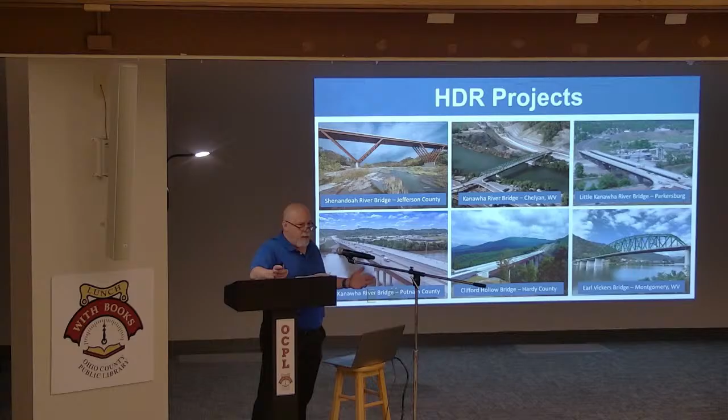So the first part of my talk is about the rehab of the Monument Place Bridge. Constructed in 1817, it's the oldest bridge in the state and was placed on the National Historic Register in 1981.

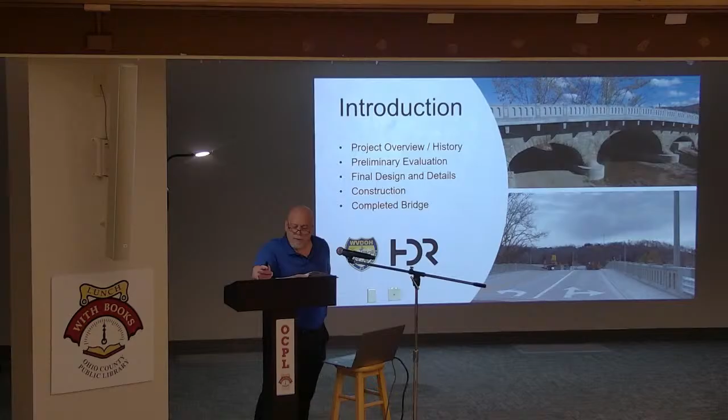So this is a brief outline of this portion of the talk. I just want to mention that the West Virginia Division of Highways is the owner of both of these structures that we're going to talk about today.

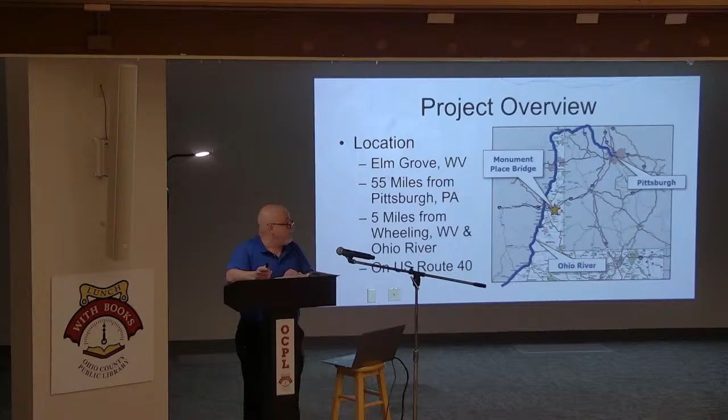So I doubt anyone here isn't aware of where Elm Grove is, but sometimes we forget that this part of the Northern Panhandle was actually a part of Virginia at the time of construction of this bridge in 1817.

In 1806, Congress and President Thomas Jefferson authorized construction of a national road to increase commerce and expansion to the west. The first portion, which terminated here in Wheeling, was known as the Cumberland Road. You can see here in red that it stretched from down in Maryland up to Wheeling, with the thought of extending it beyond that out to the west after they figured out a way to get across the Ohio River.

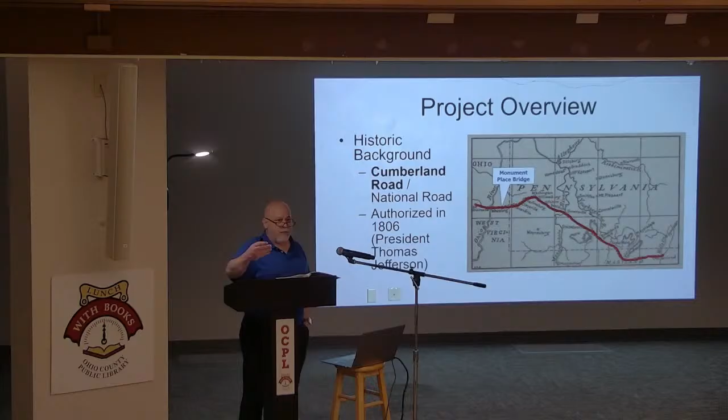So at this time, Henry Clay was the Speaker of the House of Representatives. Clay had a friend named Moses Shepherd, and Moses Shepherd happened to receive the contract to build the road in Virginia, including the necessary bridges.

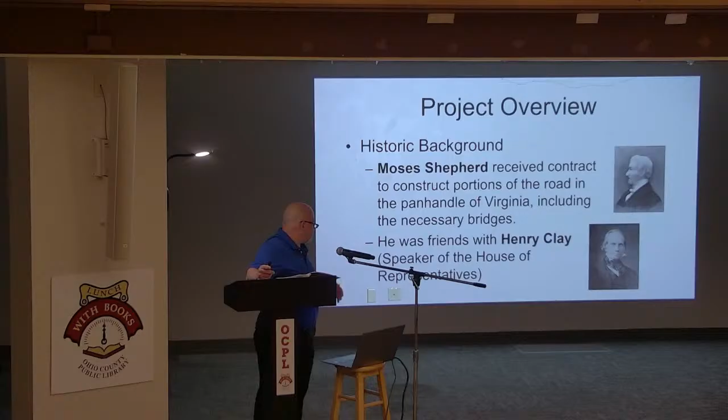So later, the national road became US Route 40, and Route 40 now generally parallels Interstate 70 through the Panhandle. The Monument Place Bridge is shown here in yellow, where it crosses Little Wheeling Creek.

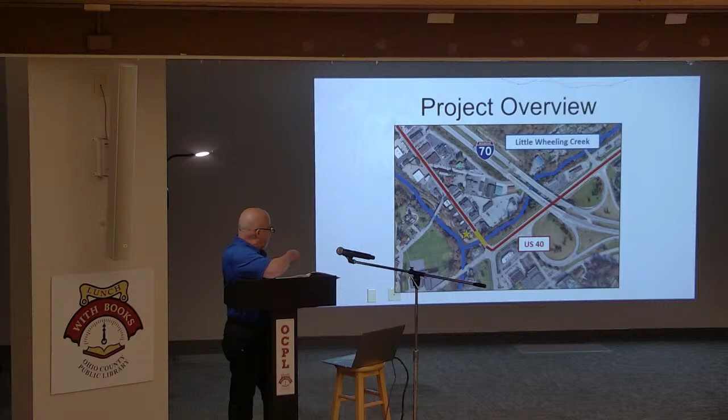It's interesting that at the time when the road was built, there were actually two bridges constructed around the same time, the Monument Place Bridge and what was known as the S Bridge in Triadelphia, also crossing Little Wheeling Creek. So you might ask yourself, why would they cross the creek twice when maybe they could have taken a more direct route and reached the same place?

Well, the answer is that Moses' wife, Lydia, really wanted the road to go past her house. And apparently Moses was a smart man.

The national road crossed Little Wheeling Creek twice. Now, the S Bridge was demolished years ago, but Monument Place Bridge remained.

These are just two photos of the original configuration of the bridge. On the left, the photo from the late 1800s, and on the right, the photo from the flood of the Ohio River in 1907. These photos were graciously donated to me to use by the Ohio County Public Library, and I appreciate that.

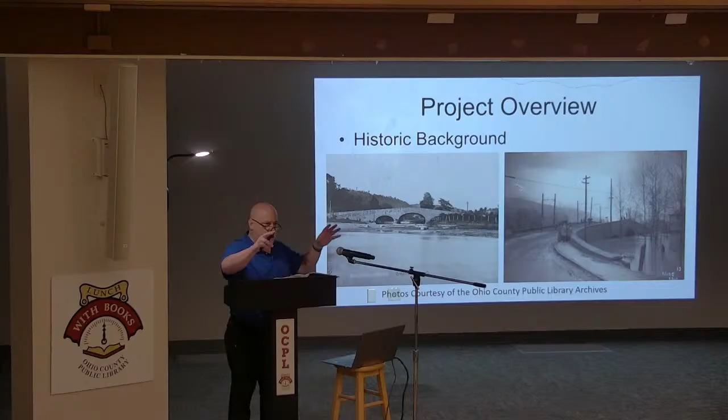So when we were first selected for this project in 2008, yes, 2008, this was the condition of the bridge. Much of what had been added, the concrete overhangs and sidewalks and the shotcrete over the surface of the bridge, was in very bad condition, as was some of the masonry underneath.

So this is one of my favorite pictures of the condition, and you can see that the barrier is being propped up off the telephone pole with a block of wood. That's the condition the bridge was in in 2008. One thing I'll note here, these utility lines attached to the bridge were wrapped in asbestos, so that became an issue along this process.

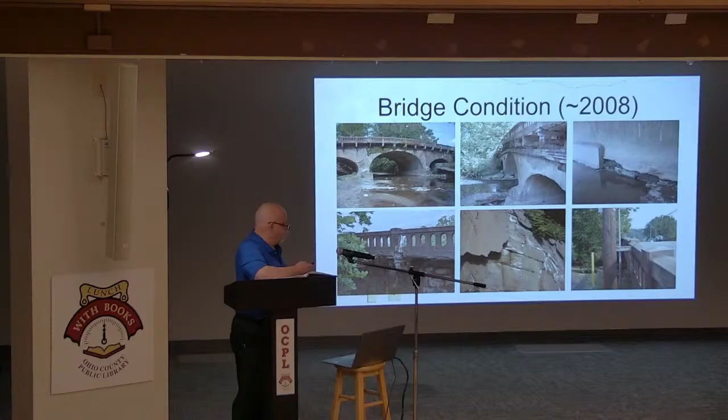So this is a timeline, and I don't expect you to read all this, but you may ask, why did it take 16 years for this project to get done? Well, when we first got the project in 2008, I had visions of celebrating the 200th anniversary birthday of the bridge in 2017 with it all being completed. But unfortunately, there were a lot of things that went on, and I'll just mention a couple of those.

We initially had a slow start on the project. Even after being selected, it didn't really get started for a while. There was a lack of information on the bridge, obviously no original design plans, so we had to get a lot of information out there in the field.

We had to have those asbestos pipes removed. We had to remove the shotcrete so we could see the condition of the masonry underneath. And we had to do a lot of field testing, drilling cores into the rock to determine the strength.

Some other things: just the nature of the historic process and environmental process took years. There were so many stakeholders on this project that it took collaboration on every phase. There were also utility and right-of-way complications that I won't get into, but that delayed the project at times.

We ran into the pandemic, which we know delayed a lot of things. And we also ran into the I-70 bridge rehabilitation project. So Route 40 was a detour for that project, and we couldn't very well close Monument Place Bridge at the same time they were working on the I-70 bridges. So that sort of explains, to some degree, why it took so long.

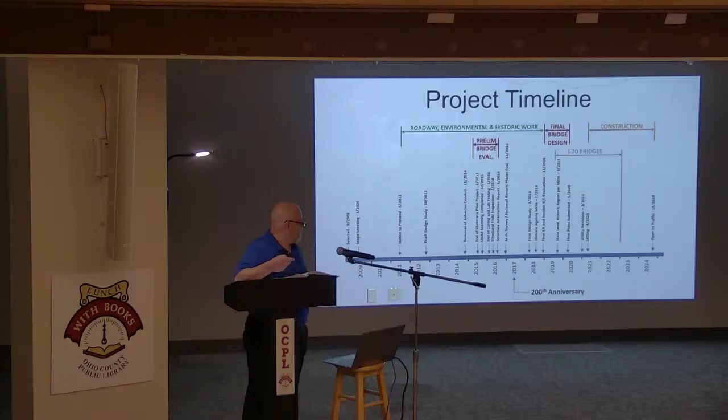So just a couple shots here of what some of the field work that was done. You can see here on the left, cores being taken from the masonry, and then those cores were tested to determine all the rock strength parameters.

The DOH themselves went out and did a LiDAR scan where they go out and determine exactly where everything is electronically. And this isn't a photo, this is data from that LiDAR scan. And from that, we were able to construct a computer model of the bridge and really identify each individual stone that was on that bridge.

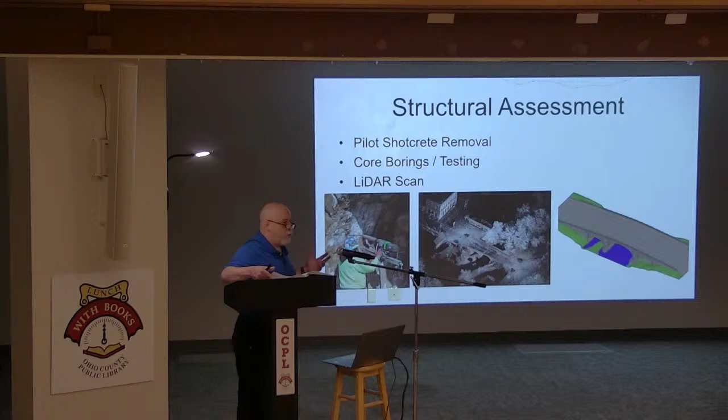So after that was done, we went in and looked at each individual stone in the field and classified each one in terms of their condition, whether they were severely deteriorated, mildly deteriorated, or pretty much sound. You can hopefully see here some of these red circles, and you'll note that these were joints in the sidewalk where water could spill through. And the worst deterioration occurred because you have roadway salt and that sort of thing spilling through onto the masonry below.

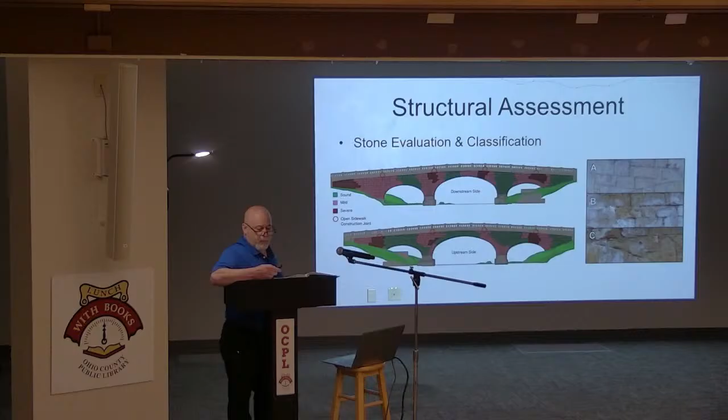Then we used a software that is from Great Britain to do the analysis. They have a lot of masonry arches there, and they have software you can use to analyze the arches, and we did that. We entered all the existing conditions of the different stones and ran the analysis, and what we found was the bridge had adequate strength even for today's modern highway vehicles. So nothing really needed to be done in terms of adding strength to the bridge.

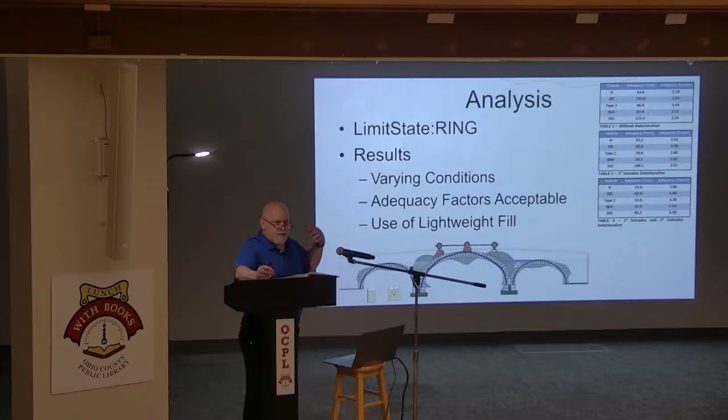One thing we did want to do, though, is minimize the loads on the foundations of this bridge. So we made the decision to remove the existing fill above the arches, the old dirt and rocks, and replace that with new lightweight reinforced concrete. That would lower some of the loads on the foundations.

So what I'm going to do now is just step through some of the details from our final plans.

If you remember one of these photos from the pre-rehab condition, the base of the arches were being eroded from the stream itself. That's called scour, and we needed to protect those bases, those foundations. So we designed and put on the plans new concrete jackets to be installed around the bases of the arches.

If you were to cut a section down through the bridge at this point, this is what it would look like. You'd be driving in and out of the page up here on the roadway, and this is the bottom underside of the arch. This is the portion that we filled with lightweight concrete, shown here in blue. That lightweight concrete is about 120 pounds a cubic foot, which is about 30 pounds less than normal weight concrete.

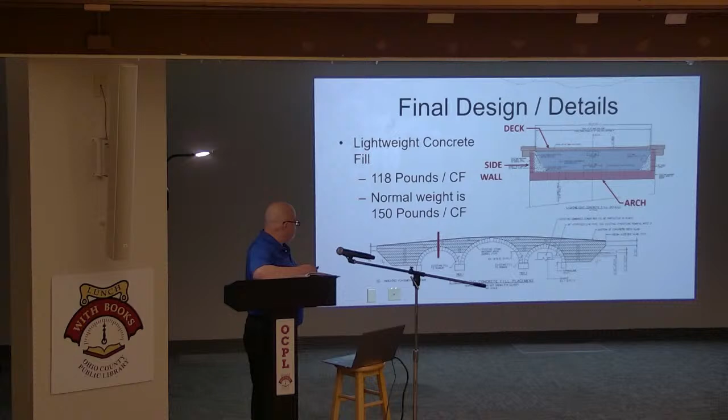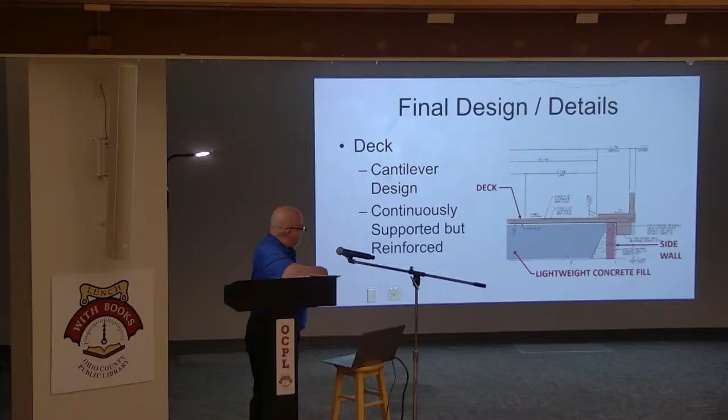The next part was the deck, and we designed it as if it was not supported continuously underneath, just to be conservative, and reinforced it with steel reinforcement. So that deck would have adequate strength even if there was some subsidence underneath. You can see the sidewalk was cast on those cantilevers beyond the sidewalls of the arch.

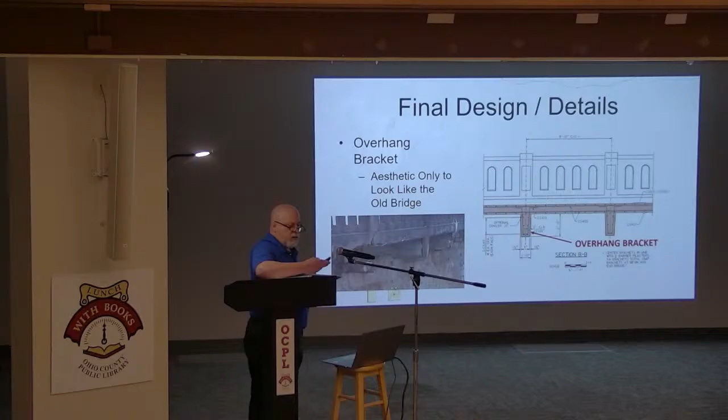One of the other things we added to the design was really driven by the environmental and historic process. They wanted this bridge to look as similar to the original bridge, at least how it looked after 1930, with the overhangs and the railings. One thing we included were these overhang brackets. If you look at a picture of the old bridge, these brackets supported that overhanging deck. We didn't need those with our new deck, but they wanted them anyway to mimic the appearance of the bridge before the rehab.

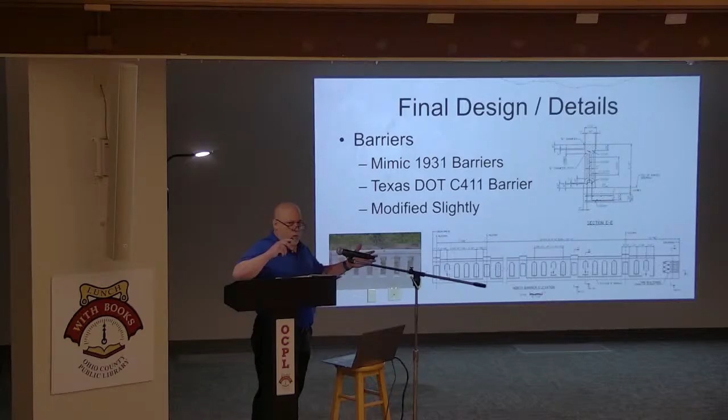The last detail I'll mention is the barrier itself. That was a big consideration, and we needed to provide a crash-worthy barrier for modern vehicles. So the problem became finding a barrier that resembled the 1930s barrier but was still crash-worthy. We hunted all over the place and found a standard barrier from the state of Texas that very closely resembled the barrier that had been on the bridge. So that was the barrier we utilized, modified a little bit to get it closer.

You recall we mentioned that salt water from the deck might spill out through. Well, that barrier from Texas has openings in it, little windows, and we didn't want that. So we actually cast concrete where those windows were to seal that up and prevent water from spilling down.

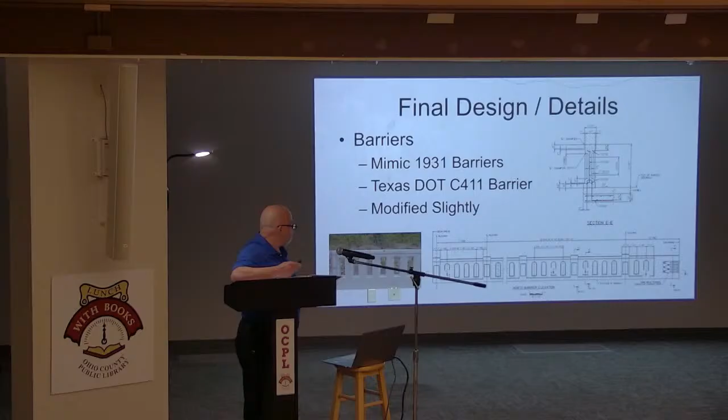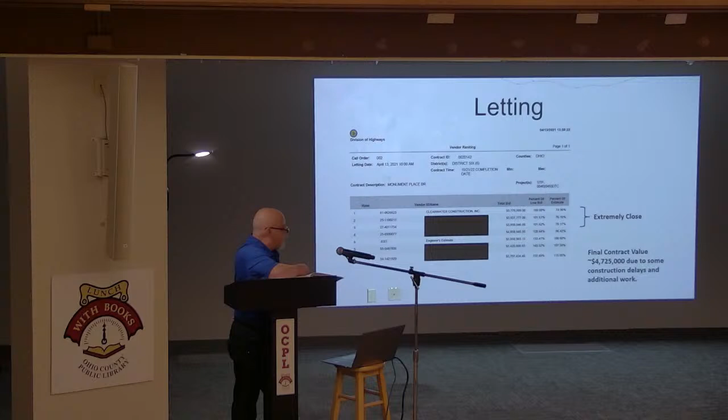In April of 2021, the project was bid, and the winning contractor was Clearwater Construction from Mercer, PA. The low bid was $3.8 million. I doubt you can read this, but the top three bids were all within about $100,000, which is good - it shows you have a close, nice, tight set of bids.

In the end, with some additional work added to this project, I'm told the final contract value came in around $4.7 million after the extras, and that was very close to the engineer's estimate, which was just over $5 million. So there was nothing out of the ordinary or unanticipated on the project.

So I'd like to show you now some photos from the construction of the bridge. The first thing the contractor wanted to do was work in the dry - he didn't want to have to work with the stream flowing. So he constructed cofferdams around and diverted the channel around his work zone so that he was able to work.

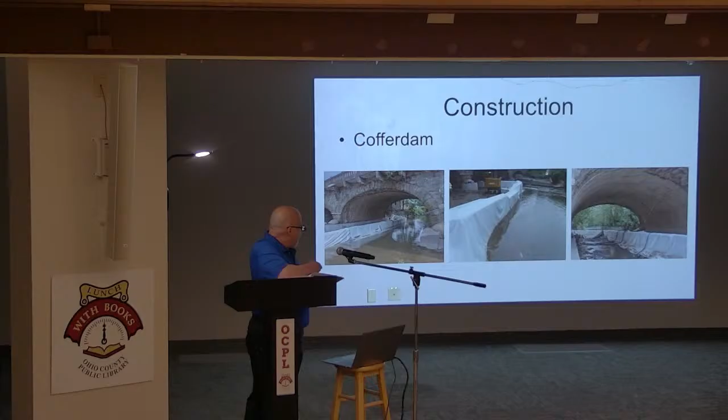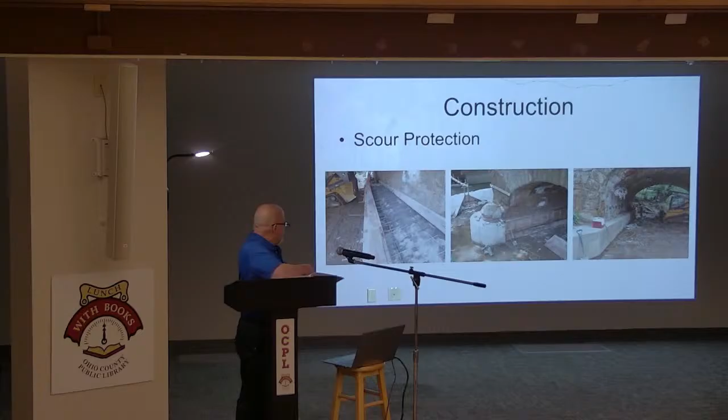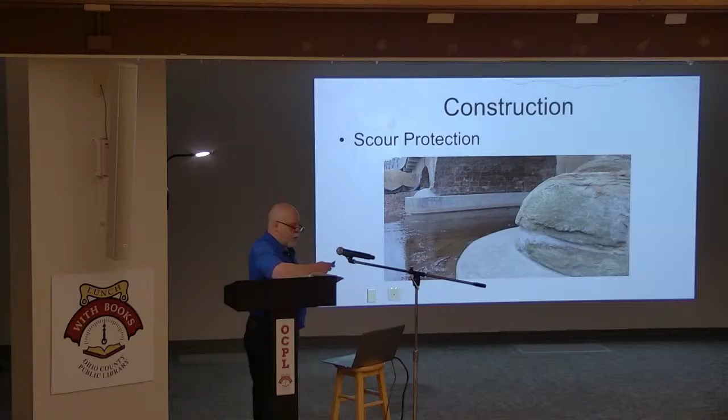When it was all said and done, I think the contractor really did an excellent job with this. He even took it upon himself to form one of the rounded ends here that we didn't expect. So you could tell that he really cared about how this looked when the project was over.

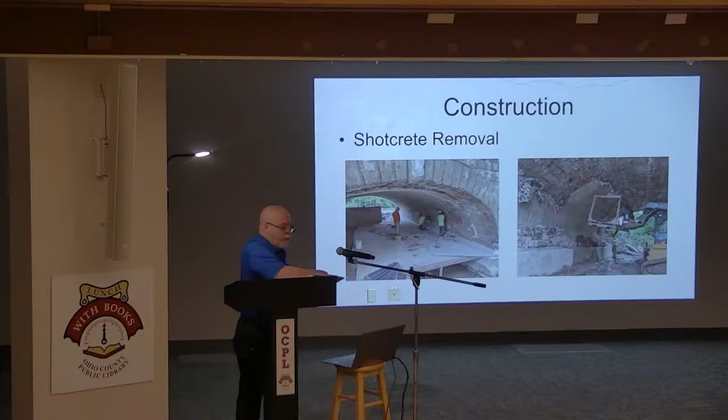Once all the shotcrete was off, we assessed the stone, and frankly, a lot of the stones were much smaller than we had anticipated underneath that shotcrete. So it took tons of time and effort and craftsmanship to repair the damaged stones, and also to repoint around each and every stone with new grout. It took a long time, and when I visited the site, there were craftsmen from Eastern Europe working on this who had been masons there. They spent a long time doing all this handwork.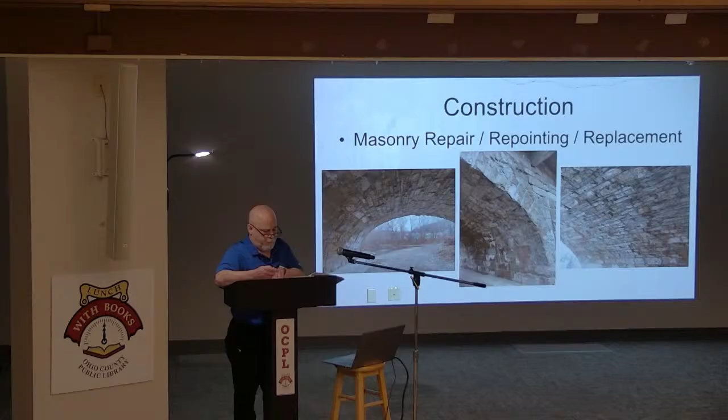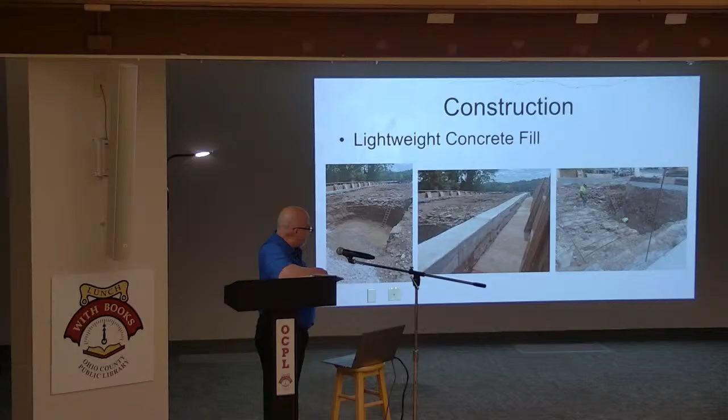After that work was done, we had removed all the dirt, rocks, and fill that had been above the arches. These are some shots of what it looked like with all of that taken off. You can see the rough top of the old arches and workers placing steel reinforcement for the new lightweight concrete fill.

After that was placed, steel reinforcement was placed, the deck was formed, and the sidewalks were formed, and that was poured.

Then the barriers came along. It was very interesting how they formed those barriers. You can see they constructed forms with styrofoam inserts for the windows, then cast the concrete around those forms. This portion of concrete in those windows is only a couple of inches thick.

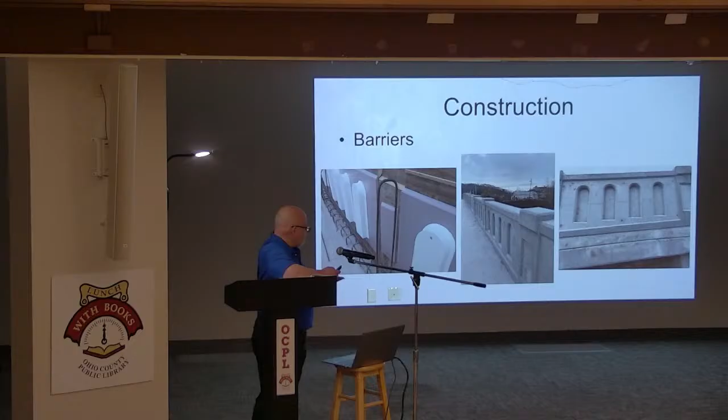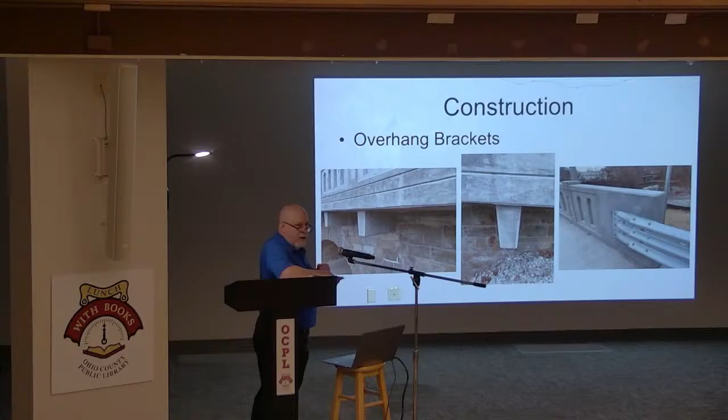We had talked about those aesthetic overhang brackets. This is what those look like after construction. They serve no structural purpose, but they're there to recreate the appearance of the bridge before the rehab.

Finally, I'll step through some photos of the completed bridge here. Some of these were sent to me from our contractor, Clearwater Construction. I think the appearance is accurate in terms of historically recreating what it looked like before.

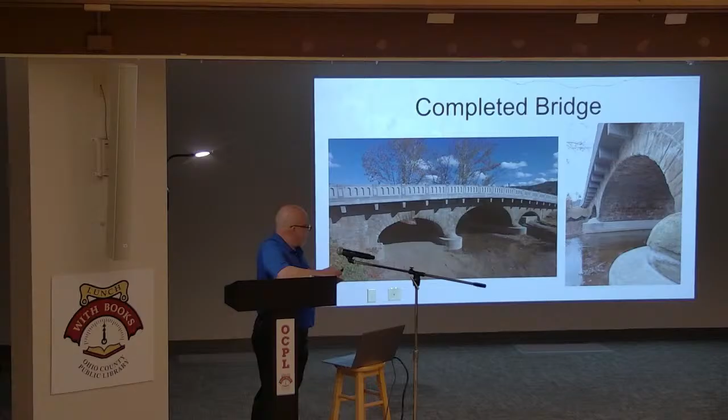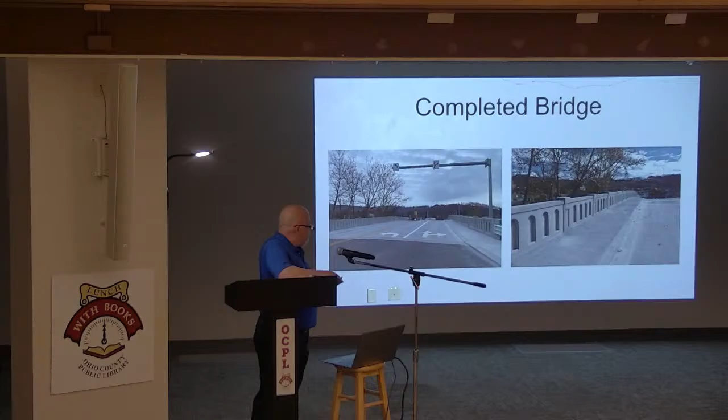But again, all the safety considerations were taken into account. We have crash-worthy barriers. Everything's designed, and we believe the bridge will last for many years to come. It was open to traffic in November of last year.

There's a nice quote here from Tracy Brown, the West Virginia DOH state bridge engineer. He says the bridge has been used and crossed by multiple generations over 207 years, including famous people like Andrew Jackson and many others. He believes the recent renovation will help ensure this historic bridge continues to be used by future generations, providing them a direct connection to a special piece of West Virginia's infrastructure that's been around since the infancy of our country.

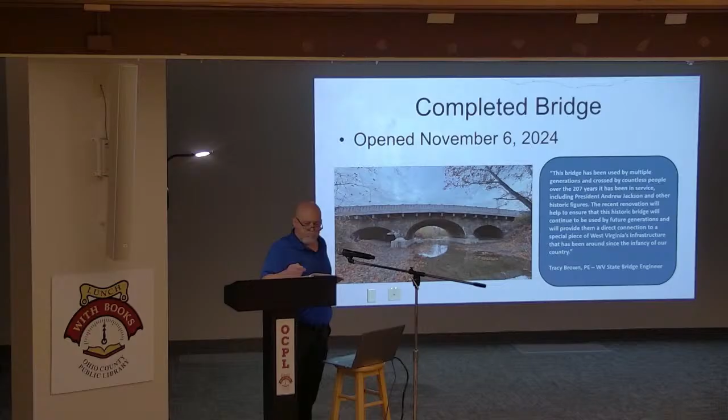So before I move on, we've got a couple minutes. Are there any questions about Monument Place that I could answer here in the middle? Yes, sir.

Our estimate—because in the environmental process you have to do a no-build and a complete replacement alternate—and if I remember right, that cost was actually more than the renovation. It was in the $5 to $6 million range. So this rehabilitation was not to be considered non-cost effective.

The question was, with recent flooding, how did the bridge come through? I haven't been made aware of any issues with this bridge. I'm sure District 6 of the DOH had done their inspections after all that flooding occurred, and if there had been anything in terms of scour or anything like that, I'm sure we'd have probably heard about it.

So, all right, I'm going to move forward to the second part of our discussion about the Wheeling Suspension Bridge rehab that was done. Again, just a brief outline: I'll talk about the history of the bridge, the scope of the rehabilitation, some of the unforeseen issues that came about throughout this project, and some specific structural repairs done during that rehab. Someone mentioned they didn't see much difference in the bridge after the rehab, and I'll say that on historic projects, sometimes that's the goal—you don't necessarily see the difference.

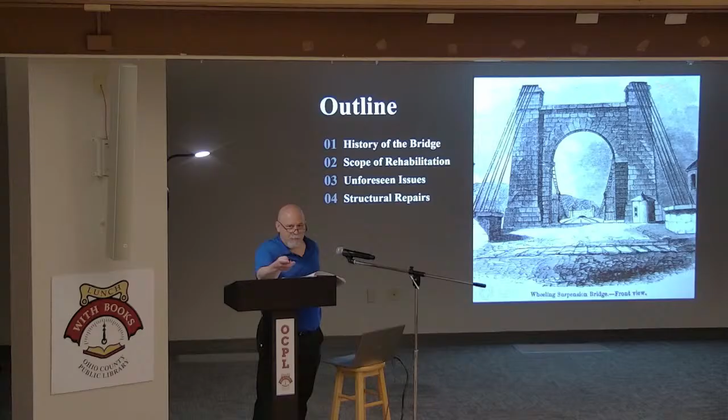So the history of the bridge: it was originally constructed in 1849. Charles Ellet was the designer and contractor on the project. Actually, the cost at the time was $250,000 for both the design and the construction. Just for information, the most recent Ohio River bridge that the state of West Virginia has done here was the Wellsburg Bridge, and that cost was $131 million.

So prices have gone up a little bit. The main span of the bridge is just over 1,000 feet—that's the length between the towers. If you go all the way back to where the cables come down in town and over on the island, it's over 1,300 feet long. But when we talk about a main span, we talk about that clear span between the towers, over 1,000 feet.

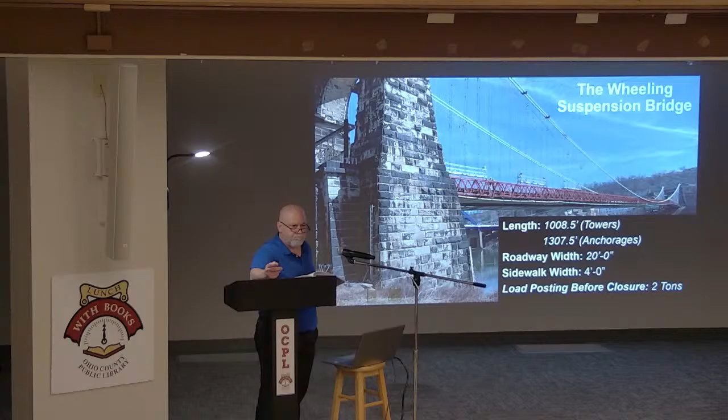And this is the original report that Charles Ellet did, over here on the right. It's hard to see the text—in fact it disappeared. But at the time, this was the longest clear span in the world, over 1,000 feet. Just for reference, the longest clear span in the world right now is over in Turkey, and it's over 6,600 feet long, which is 1.25 miles. So they've really pushed the limits since this bridge, but this definitely was a record setter when it was first constructed.

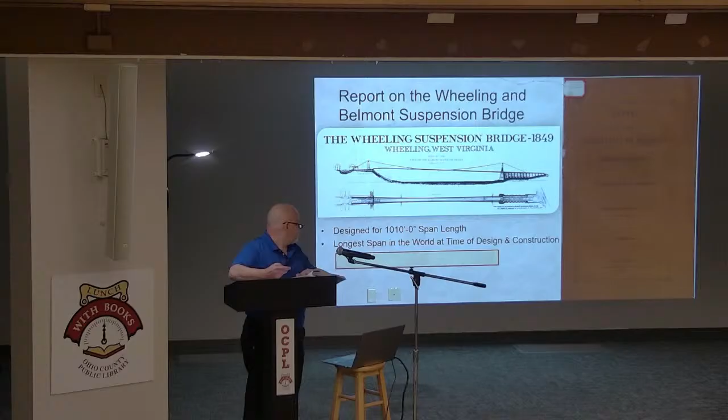Ah, there it is. So unfortunately, in 1854, there was a terrific storm. This is a quote from the Wheeling Intelligencer in 1854, and if you want, the library here has reprints of all those articles online. I'd encourage you to go read what people had to say about the collapse of the bridge in 1854. Pretty much the whole deck and a lot of the supporting elements collapsed into the river in that terrible storm. We believe it was probably due to wind, to excitation of the bridge, but it did collapse.

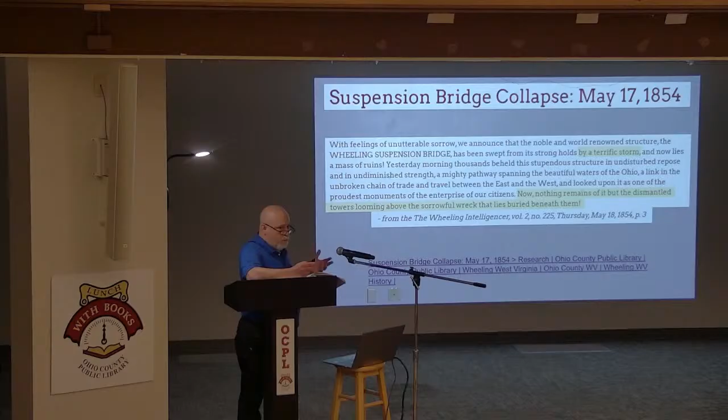And the towers were left. Some of the main suspension cables were left in place—some had fallen but could be reinstalled. And that's what was done. In less than two months, they opened a 14-foot wide temporary structure. It was a single lane, and it reused much of that—the towers and the main suspension cables.

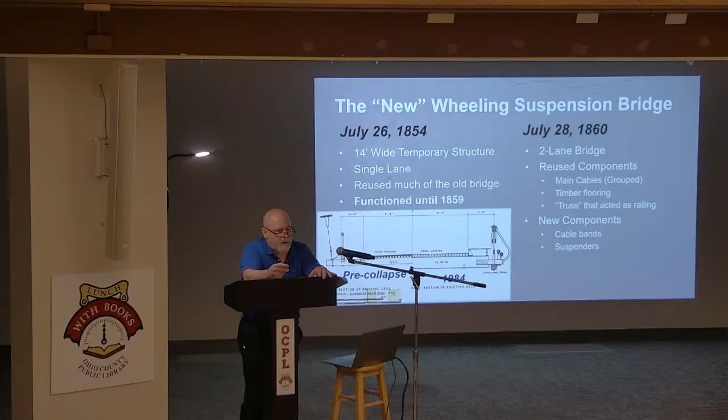And it wasn't until 1860 that it really took its configuration. They added a lot of different suspender cables and additional strengthening to the bridge. But this bridge has changed over the last 170 years. I had a timeline here of all the different work that had been done on the bridge, but I took it out of the presentation because it was too hard to read, and there were really too many different times that this bridge was worked on and different components added.

So when we were selected for this project, the scope of work was supposed to be providing new lighting for the bridge—both functional and decorative lighting—doing a full paint job on the bridge, and doing what were really maintenance and preservation type repairs structurally. Nothing significant in terms of the strength of the bridge, but just repairing things that had deteriorated.

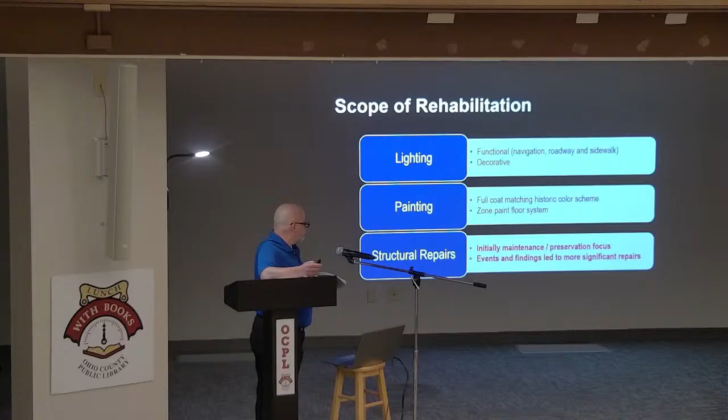So the first thing we had to do were a lot of field inspections. We wanted to get arm's length on every component of the bridge, and that's what we did using whatever means were necessary. We did barge work to get out in the middle of the river. We have a group of free climbers that do rope-assisted climbing to inspect all the cables.

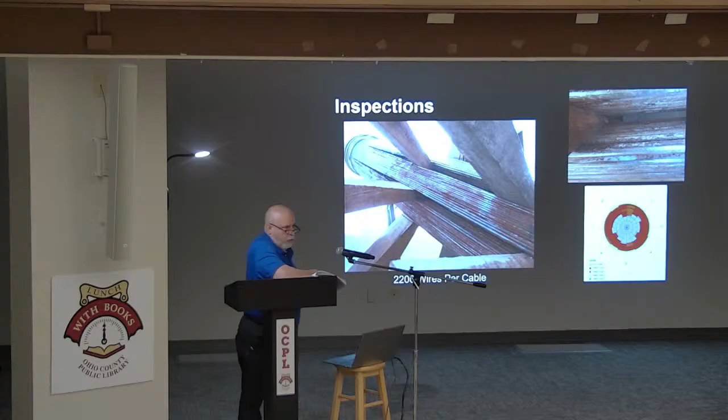Good. It took a lot of work, and not from me - the electrical engineers spent a lot of time developing the schemes and determining what fixtures would work and give the appearance that everyone wanted. On our design plans, we actually included a lot of the rendering information so that in the field, when they installed and tested the fixtures, it would give the appearance that everyone had agreed to.

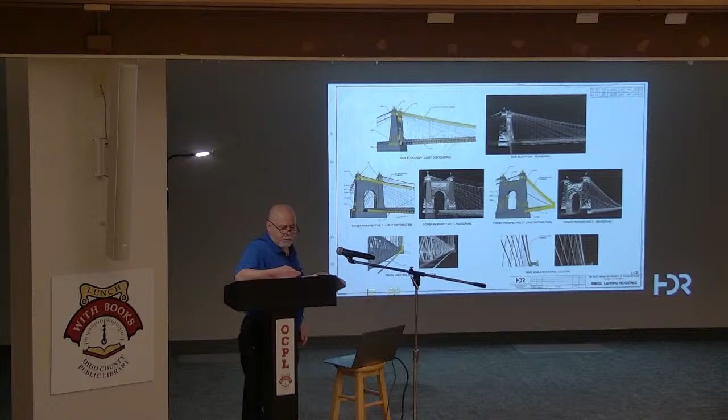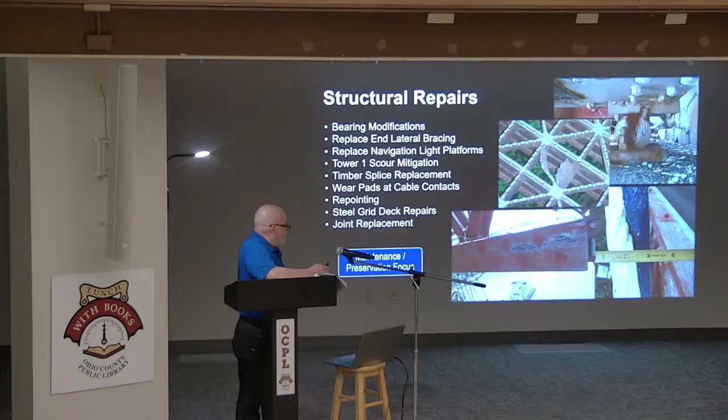But I'm going to talk about a couple of things that happened that changed the scope of the project.

You guys remember this? I was standing on the beach in Myrtle Beach and I got a phone call. It was the district engineer in Moundsville, who called me and said, 'I think we got a problem.' He said, 'What should we do?' He knew that folks had to go out and look at the critical components of the bridge and determine if there had been any damage. Because the bridge has for years been posted at 2 tons, and the bus weighed about 20 tons - 10 times the posted limit.

Well, luckily, no distress was found in any of the main components.

Not long after that, a lot of people asked me, well, if you can drive a 20-ton bus across that bridge, why isn't the weight limit 20 tons? That reminded me of this - I like Calvin and Hobbes. It reminded me of the cartoon where the son asked the dad how they know what the load limit on bridges is, and the dad said, well, they drive bigger and bigger trucks over the bridge till it falls down, then they weigh the last truck and rebuild the bridge.

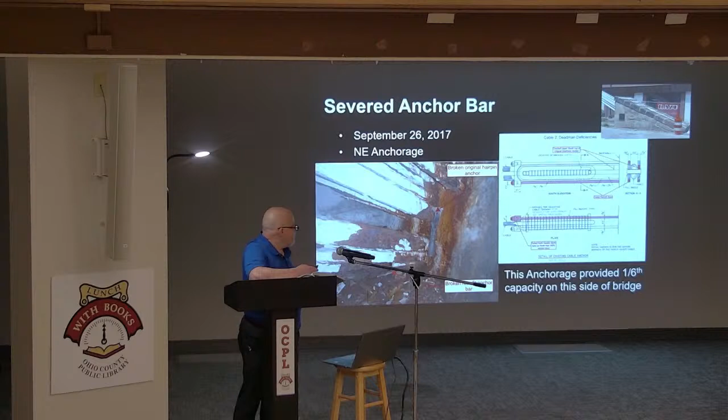We also found two breaks in the anchor rods on one of the main cables. That reduced the capacity on that side of the bridge by about one-sixth. There are two main suspension cables, and they split into three groups each when they enter the house, so there are six sub-cables in each of these anchorages, and one of the bars that connected one of those was fractured.

Another thing found around that same time frame was some deterioration of the stay and sway cables. Those are the smaller cables that you see, looks like a nest, okay?

They actually had one that snapped. I don't know if you remember that, but the bridge was closed then because that occurred. And it was found that a lot of the other ones were reaching a serious condition like that too.

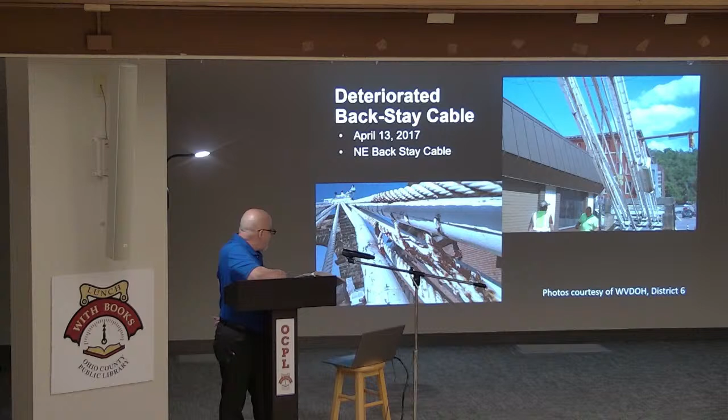You can see some of those cables. This is one of the stay cables - stay meaning in the plane of the bridge. Sway cables went off to the side, sort of to take wind in that direction. You can see one of these stay cables here just unwrapping.

So we knew that something needed to be done and added to the scope of the project.

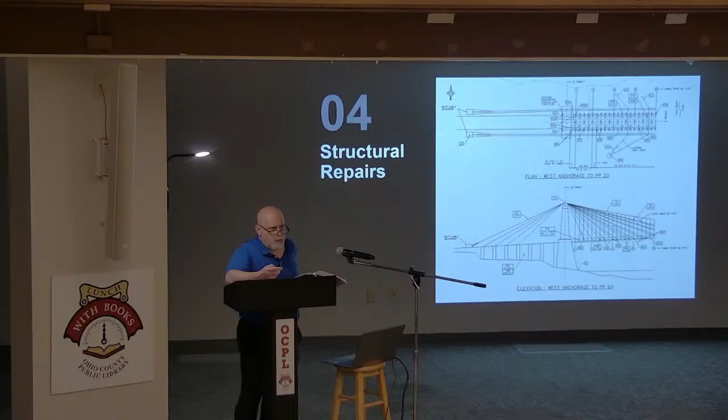With the deteriorated stay cables and sway cables, and the fact that it appeared that at least some of them were reaching their life, the decision was made to replace all of the stay cables and sway cables on the bridge. That was a big effort.

When you go out there and look at all the cabling - not the main cables, but all the other cables on that bridge - and see how many there are, and the amount of steel cable that went into that work, it was a lot. That was a significant part of the cost of this project, replacing all those cables. One of the things the contractor had to do was we defined what type and size of cables needed to be replaced out there.

We replaced them in kind, so you couldn't really tell the difference that something had been switched out. But we had to unload each of those cables, measure the tension in them, put new cables in, and jack them back to that same tension of each cable that was removed on that bridge.

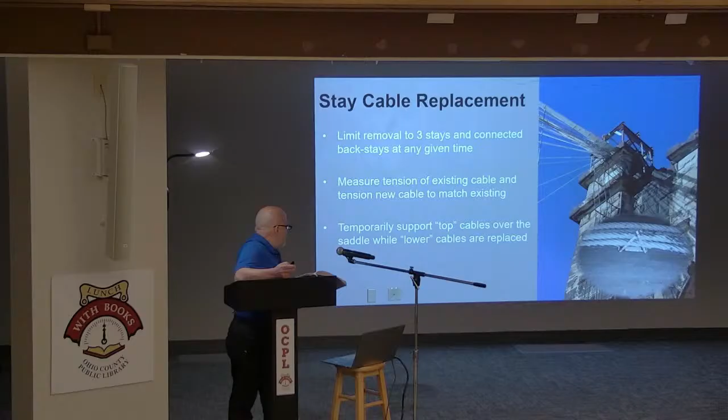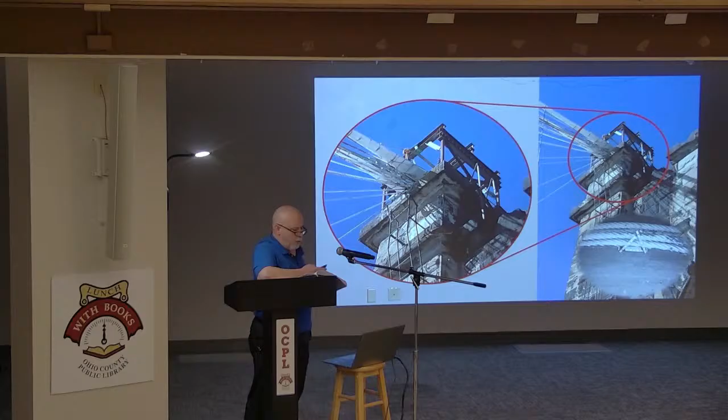And that's sort of this process. I'll point out that there was a huge nest of cables, some underneath the main suspension cables on top of the tower, and that created a very difficult situation for the contractor to be able to get to those cables to replace them.

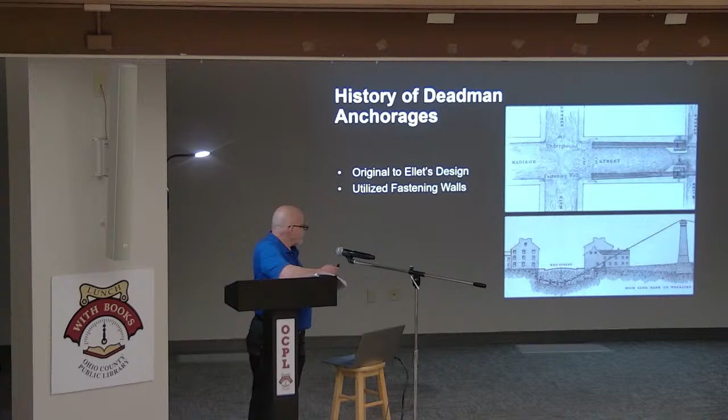So with those unknowns, the decision was made to design an independent anchorage system for that failed location.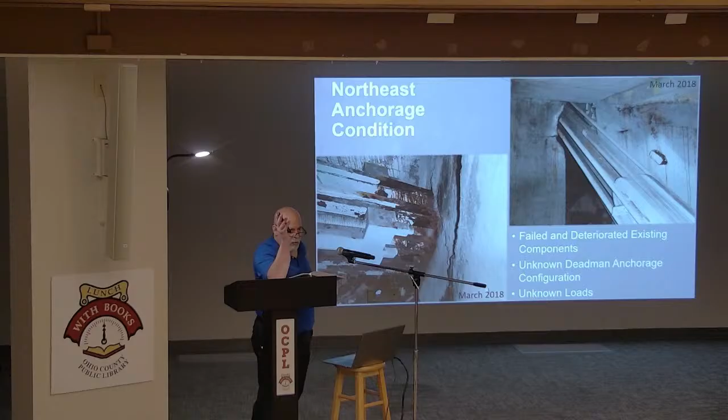Actually, one of the repair anchor bars is one of the ones that failed. So it wasn't just the original anchor bars, it was some of the repair steel that was problematic.

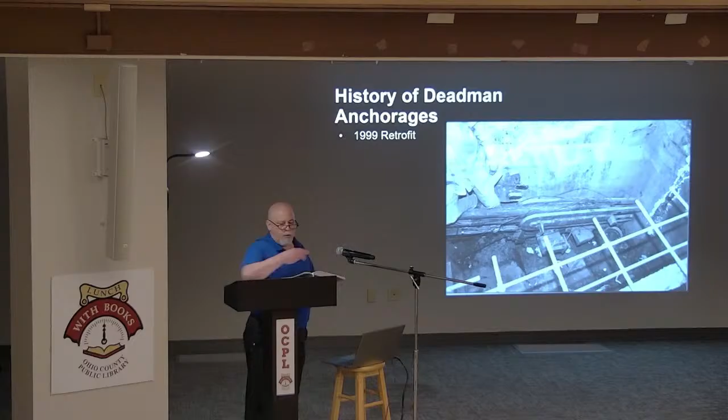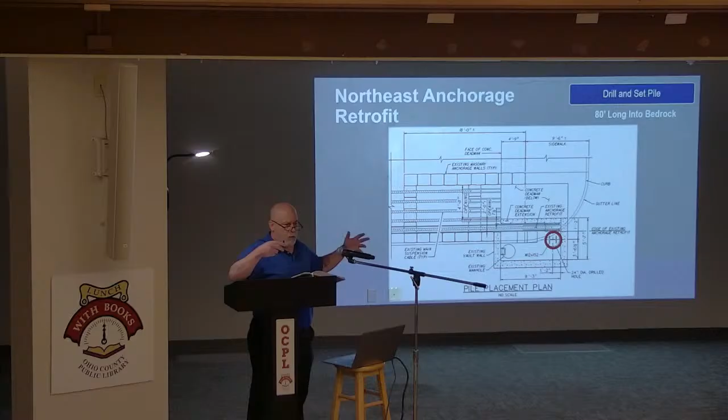The first thing that had to be done was dismantling of that anchorage house. All the stonework and everything was identified and set aside so that they could get in and do their work.

After that was deconstructed, the first thing was that we drilled a new steel pile 80 feet down into rock. That's circled here in red.

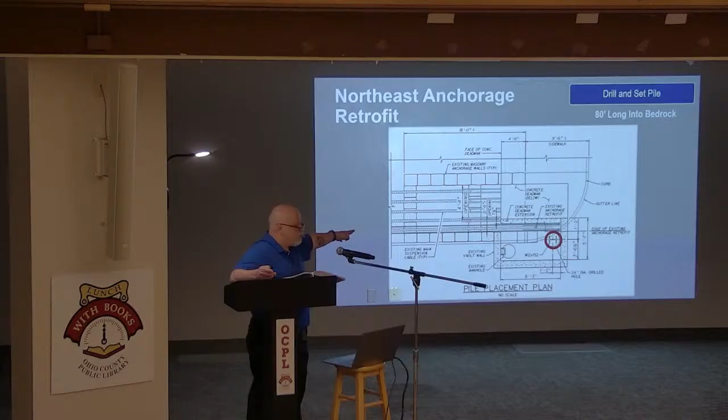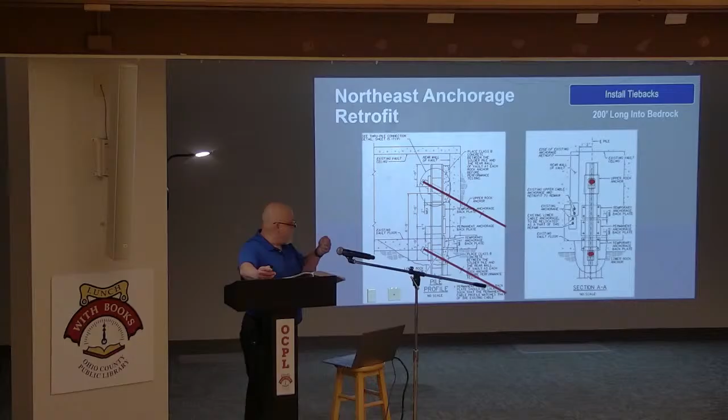Then 200-foot long, high-strength steel tiebacks were drilled into bedrock to resist the pull of the main cables. This is a photograph of one of the specialty subcontractors on the job drilling one of those 200-foot long anchors back into rock under Main Street.

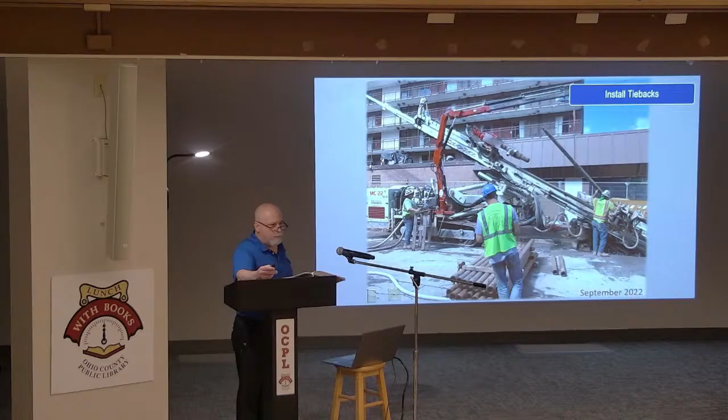So then what we needed to do was get the load out of the main suspension cables and temporarily support it, so that we could remove that existing anchorage, those existing anchor bars, and then attach it to the new pile and tiebacks.

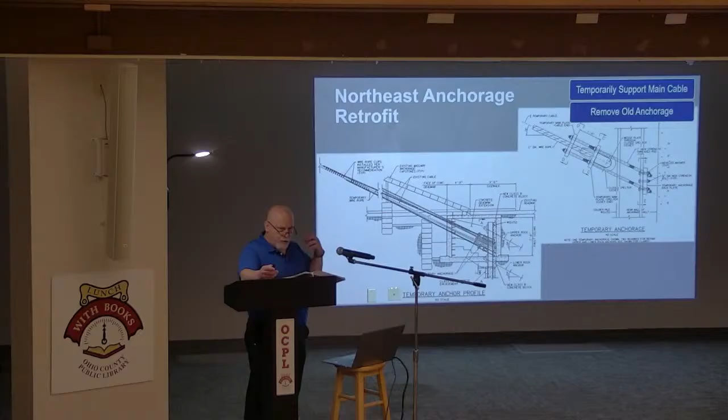So we put temporary cables here, attached to the main suspension cable, and anchored that to the pile temporarily while the connection to the anchors was cut.

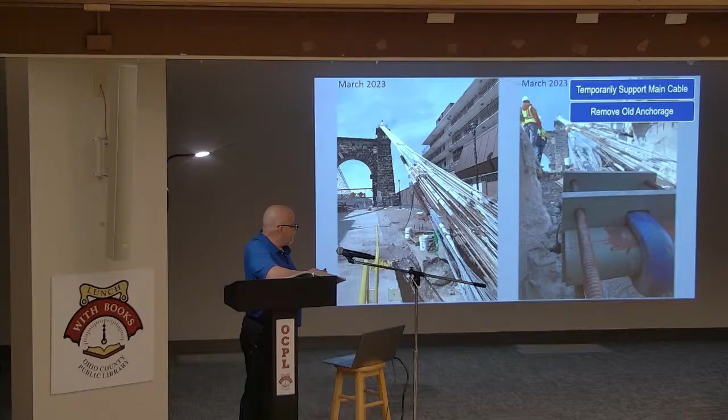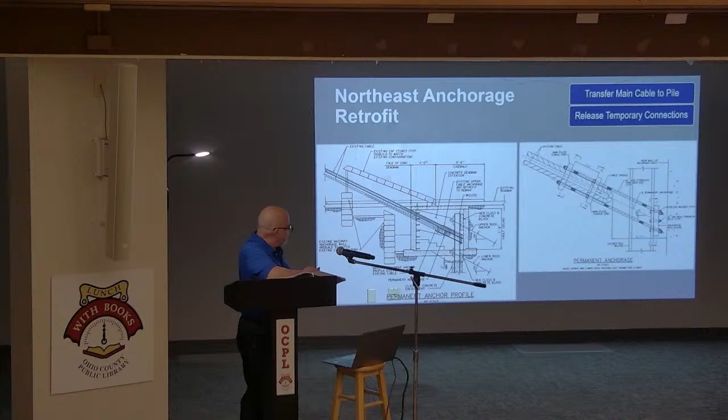And that old anchorage was removed. Then that main cable was attached to the new pile and tiebacks, and we released the temporary connection. The last step was actually reconstructing the anchorage house.

This was another place where I thought the contractor did a fantastic job, because some things had changed inside and he had to adjust some dimensions. But I think it really looks exactly like it did before the work.

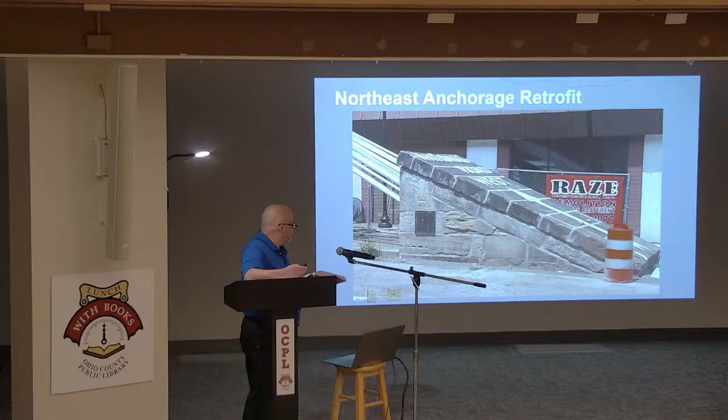And then post-rehab, this is just some photos. I stopped this morning and tried to get a clearer photo inside the anchorage house to see if we could see the pile back there, but you just can't see it. It's too deep down in there.

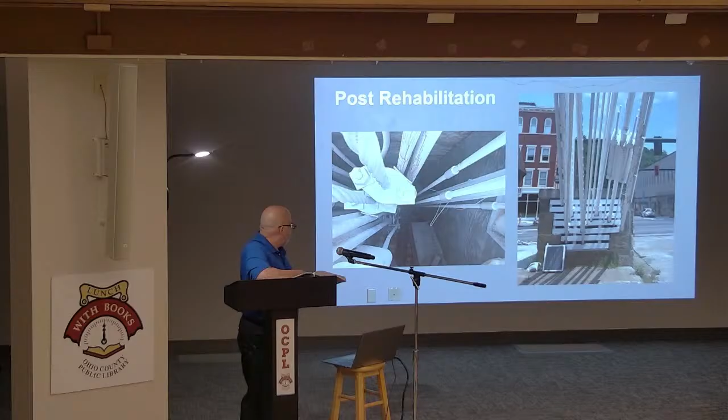But you can see that all the other stay and sway cables are all brand new. All the timber work has been repaired, and all the painting has been done. You can see a new stay cable here, and the attachments. We've made sure we've offset those so that there's not wear on any of the components moving forward.

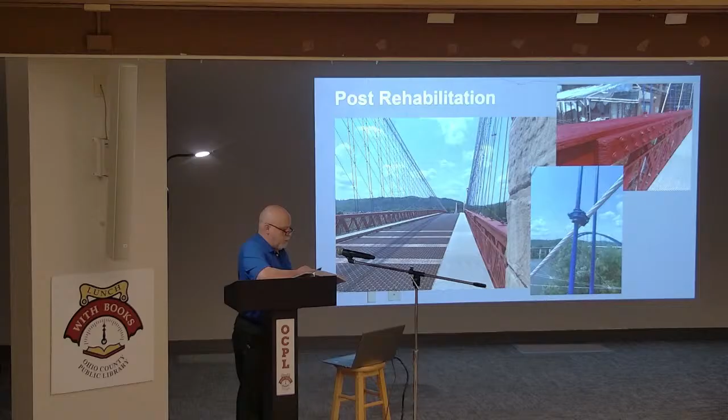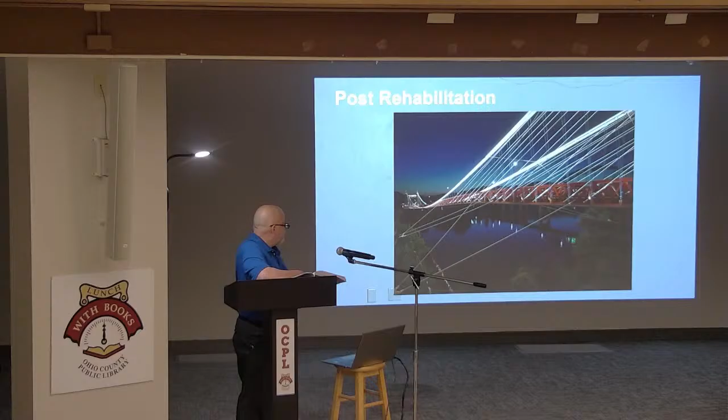And then just some shots of the lighting at night. And that's it. I think we have some time for questions.